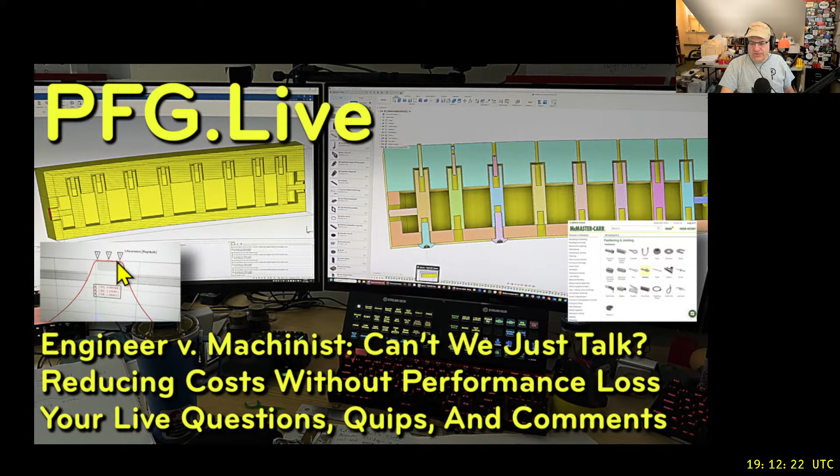So we started getting some really nice results, and when I was all done, I had a filter. If you look at the thumbnail, you'll see a little picture of the filter results that we were getting, and it was molto bono. It was excellent.

So what happened was, that was me as RF engineer, and it was time to make this thing. So how are we going to make it? I had to hand this design over to the machinist.

That's how this whole topic started. In any organization or venture, going from some idea to a concept of how to make the thing, to finally making the thing, you're going through different processes where the goals are different. So the RF engineer had a really good idea and got to a point where he realized, at least in the computer, physically, this is going to work.

Carl's asking, what's the Q of your filter? Q is an interesting calculation. The filter is from 902 to 928 megahertz, and we're showing about 1 dB of loss. It's the steepness of the skirts which determines the Q. I'm not ready to talk about that today, so we could talk about that offline, maybe in the after party roundtable.

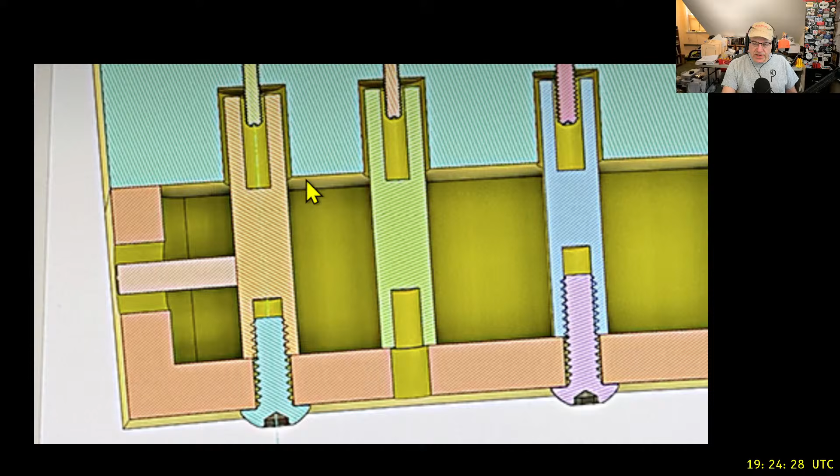The second thing that happened, and you have to look very closely at this picture to see the difference, on the left side the tuning screws were made out of 2-56 hardware. And if you've ever played around with 2-56 hardware, you know it's very small and very flimsy. So the machinist says to the engineer, can we make those bigger?

And hey, I have another idea. What if those little holes that the tuning screws go into are the same size as the tap drill for the screws at the bottom? In fact, we can make that part completely symmetrical, so it's the same drill that drills the top and drills the bottom.

The RF engineer, recognizing greatness when he hears it, says, I think we might be able to do that. So it turns out that they worked together and they came up with this idea.

So that's how we ended up redesigning the rod. Now, as soon as you do that, the RF engineer has to go back and re-optimize the design for the new numbers.

So now it's going to be a 5/16 inch rod, and now it's going to be 4-40 screws. Off the simulations went, and it worked. The design came in for a landing because we weren't that far away from optimal.

We made some adjustments, went back to the RF engineer, he re-optimized, and everybody's starting to get happy and excited. So the design is working.

Proteum Machining says, if you're not talking to yourself in the shop, you're not challenging yourself. I guess I'm challenging myself.

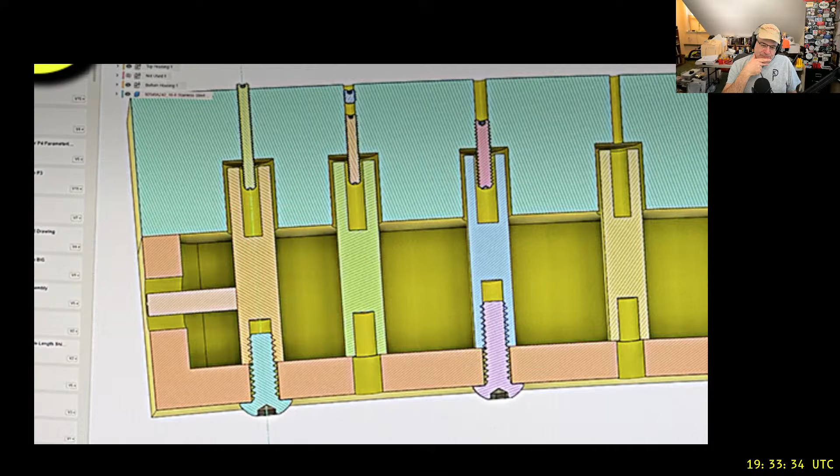So going back to the optimization in the RF simulation software, we came in for a landing and have an electrical design that works super.

Okay, the next thing is, how do we finish the mechanical design of this? This has a top section as well as the bottom section. We've been focusing on the bottom section. Well, the top section now is going to sit on top.

This has an alignment thing where it wants to be as closely aligned as possible. Also, not shown here, it's going to be screwed around the periphery so the top and bottom are screwed together pretty tightly. And you might notice that at the split line, there's another rather large aluminum to aluminum connection.

So the RF engineer says to the machinist, is there any way we can make sure these two sides, when they go together, are very, very flat? Can we make them very flat?

Of course you can. If we have to, we could just hit it on the lapping plate, or we could hit it with the PFG stones. If necessary, we could do both, and we could also surface grind it. Believe me, we can get those two pieces very, very flat.

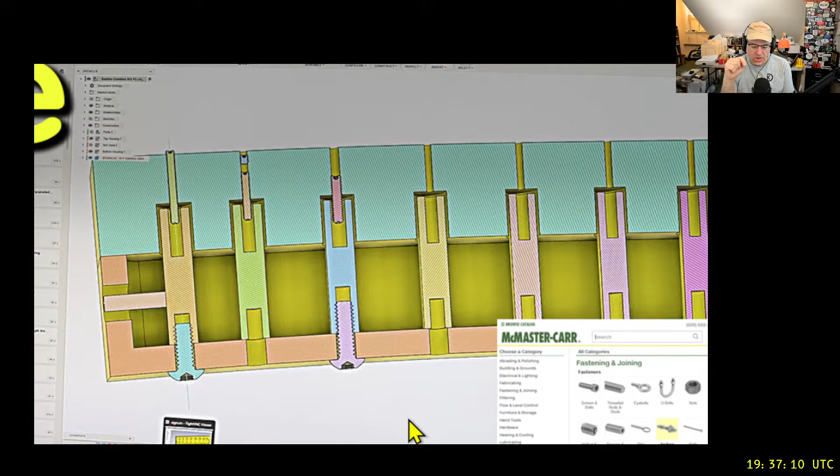The machinist asks the RF guy if he's thought about how to mount this thing in a structure. The RF guy stares blankly and says no. The machinist suggests adding a couple of screw holes to mount it to the structure it's going to be in. The RF engineer, dumbfounded, says that's a great idea. So there will be additional threaded holes so this can be screwed to a bracket or whatever.

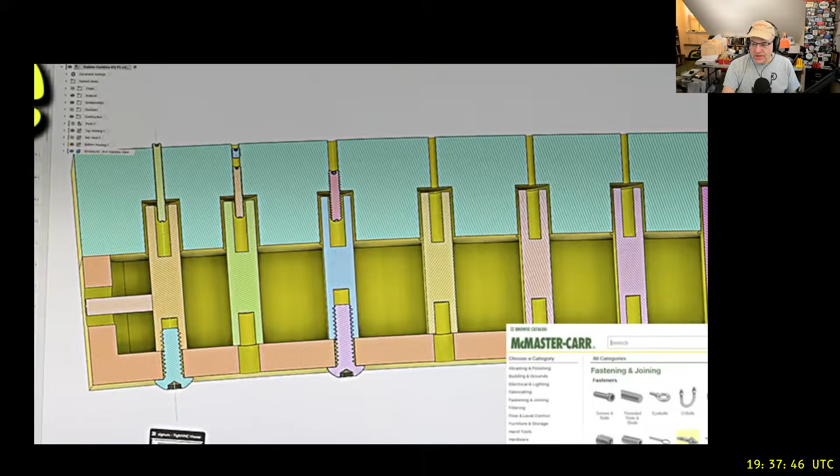Finally, one design element we haven't settled on yet is the connectors. Stay tuned, that's coming later. Right over here, where you see the abstract input port, we don't have a connector yet. We haven't picked the connector, and it's going to be part of the equation we'll have to make work. So that's the disclaimer for what we haven't done yet.

The really good news is that the RF engineer took the machinist out to lunch, and they're getting along fabulously. So that's working out pretty well.

Evil says, connector? Just solder the coax to that in the field and seal it with caulk. Get out the aluminum solder. I actually have aluminum solder. Topic for another day.

So let's talk about these aluminum to aluminum connections. Has anybody here ever seen aluminum? Every morning in the mirror. Yes, we'll bring that up, I'm getting all sorts of good ideas.

If you take a cutting tool and cut a piece of aluminum and look at it, how long before you're no longer looking at aluminum? The answer is microseconds, because aluminum - oh, there it is. Live aluminum from Brooklyn, New York.

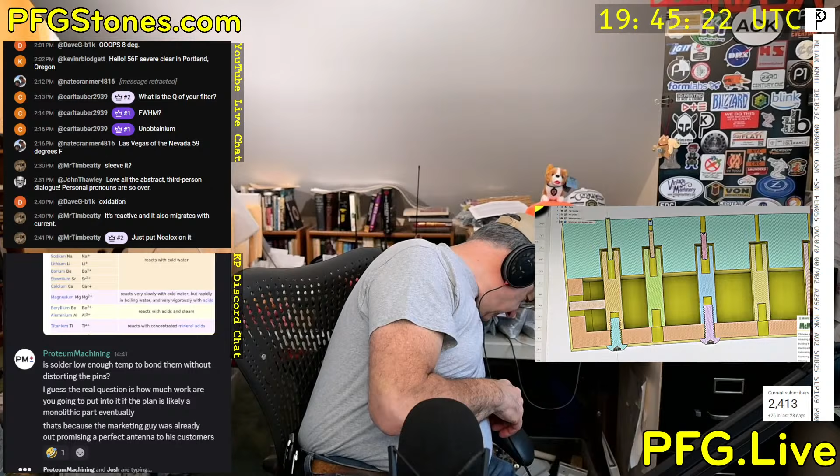Also, Robin says Alodine. So there is a mil-spec coating that is variously called things, but Alodine is a commercial term for it, and I've used it. Do I have something? Yeah, I do. So when you see a piece of aluminum that has a nice gold color to it, that potentially could be what we're talking about.

Josh says, I use Alodine at work. There you go. Proteum Machining correctly says MIL DTL 5541. You guys are awesome. So this is an antenna that I designed and built, and this has an Alodine coating. So Alodine to Alodine has potential - little joke there. And we'll see what happens. But we're going to go ahead and the first one, P1, is just going to be aluminum, and we'll see what happens.

Carl Tauber asks, have you designed the antenna for the front end? No, it's a separate problem. So we have some antennas in mind for some of the applications that we have. So the answer is no. The antenna that I just showed you, by the way, is a potential directional antenna for that same band. So you can't swing a dead cat around here without hitting an antenna appropriate to the task.

So once again, we visit the aluminum electrical issue. Somebody said, what about use Noalox? So Noalox is a very good example of a product that is commercially available, and it was designed to deal with aluminum to aluminum electrical connections. I don't know that it's... I will look at it. I don't think it's super applicable here, but it's worth looking at what is it supposed to do and what is its mechanism of action. Maybe that's a useful thing.